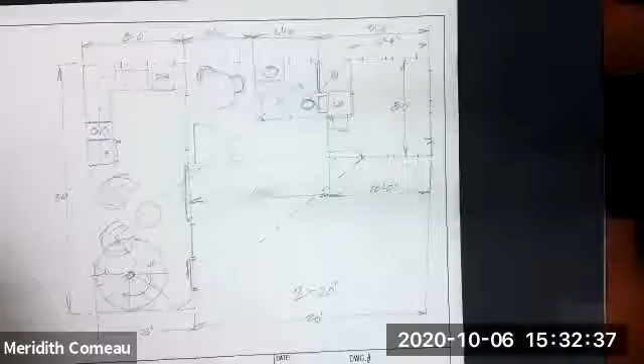All right, so as promised, I'm going to interpret this sketched floor plan into a real floor plan. And I'm discovering that I've made some errors with some of the measurements. So some of these dimensions that I have here are going to have to be reinterpreted.

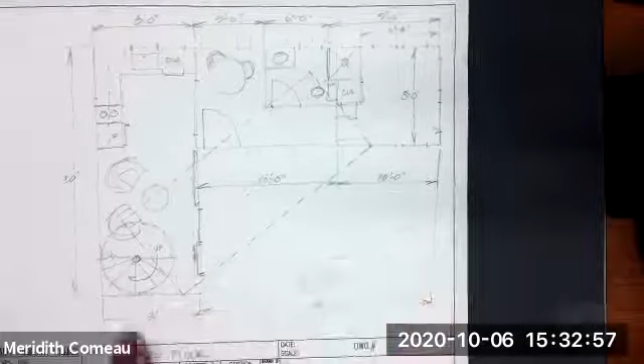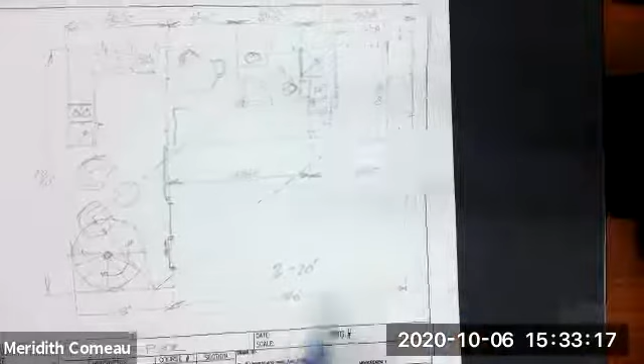So the first part is I want to get these two containers drawn properly. So I've got an 8-foot wide by 20-foot container here, and then another one attached 8 feet wide by 20 feet here. And I just don't think I drew this properly the first time around. So I think I'm actually going to have a little bit more room lengthwise here than what I have drawn. So I'm going to do some math here. This is going to be 28 feet in this direction and 20 feet in that direction.

I want to position that on the page so that I am utilizing the page and have it kind of either a little bit to the left of the page so I have room for my title block down here, or I may want to center it. So you can kind of decide on your end what you'd like to do.

I usually draw with at least 2 sheets of paper below me, and the first thing that I do is establish both a vertical and a horizontal line to begin with off of the edge of the paper. So I'm using my rolling ruler to line it up on the edge of the paper, and I'm just going to roll it in about maybe about an inch and put in a construction line, and then I'll do the same on the bottom, and that's going to ensure that my things remain straight and somewhat perpendicular.

Now I'm going to measure everything off of either this or this line. So let's go over from that. At the 1/4 inch scale, I want to measure over 8 feet. And I'm going to do that in 2 places and put in a construction line. And then I want to measure over from that line 20 feet in 2 places.

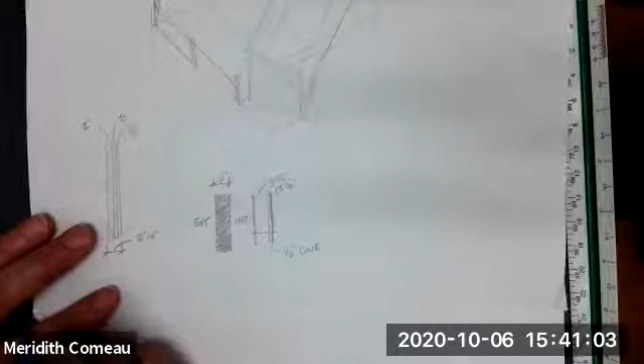I just wanted to work out approximate dimensions for this wall for the way I was going to fur it. So what I'm going to do is draw these walls at about 3 inches, because again, it's schematic. And then I'm going to provide the dimensions to the outside for the outside walls. And if I have an interior partition, I will be using 2x3 studs instead of 2x4s.

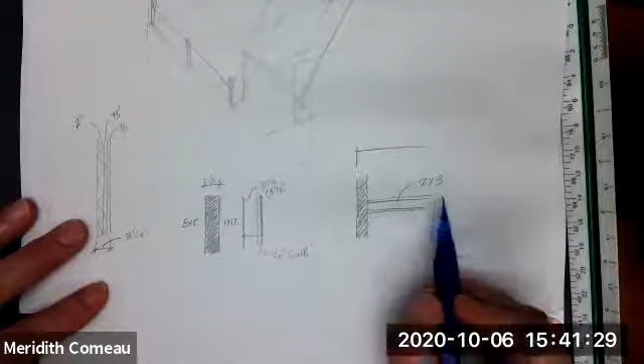So those walls are going to have gypsum wallboard on either side. So it's 2.5 inches plus a 1/2 inch plus a 1/2 inch. So it's going to be 3.5 inches, or I'm going to draw these walls at about 3 inches as well on the inside. So all my walls in my case, because they're all container walls, are all going to be about 3 inches. And that 3 inches works really well with the grid, because half of a box is exactly 3 inches if you're using 1/4 inch grid.

Or with this, you're going to be able to read that 3 inches really clearly on the 1/4 inch scale. So these walls, in other words, don't have to be exactly the size that they're going to be in real life. You just have to have an approximate size. So I'm just going to go around and make marks for where the 3 inch mark would be all the way around to define my boundaries for these 2 containers being put together. And this is the time-consuming part where I'll just kind of pause and I'll come back.

All right, so now what I have is my walls all laid out and the thicknesses of my walls all laid out according to the real dimensions. And so in the next step and in the next video, I'm going to go ahead and locate all of the openings that I have. Actually, no, what I'll do first is locate all the interior partitions so that way I can make some decisions, and then I will locate my windows and doors afterwards. So I'm going to do these in little pieces and parts so that you're not watching a big long video all at once.